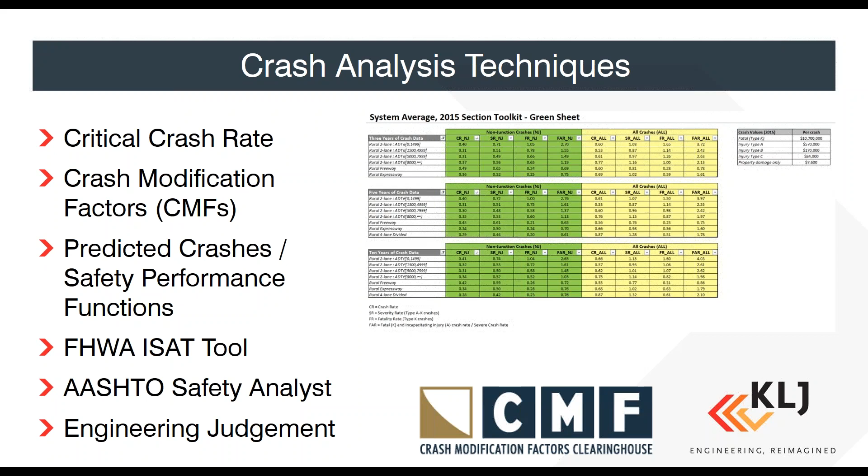When we really look at the basis of all these future crash analysis techniques, CMF data is really at the basis of all of those. And what happens with CMF data is, because it's based on a number of different studies, some of these improvements have quite a big range of what that expected safety benefit is.

So two examples I pulled out. One was a DDI interchange, converting an at-grade or diamond interchange to a DDI. I pulled all the crash types and crash severities that lined up where they were all the same, and even after filtering out some of those crash rates, we still have a range of about 0.54 to 0.81 CMF factor. That's over a 30% difference in those expected safety benefits for that type of interchange.

J-turns or reduced conflict intersections show an even greater range of safety benefit when you look at the applications, between 60% all the way down to only a 13% improvement, which makes a big difference when you have some of those higher injury type crashes, and really can skew your final preferred alternative one way or another based on which CMF factor you're choosing.

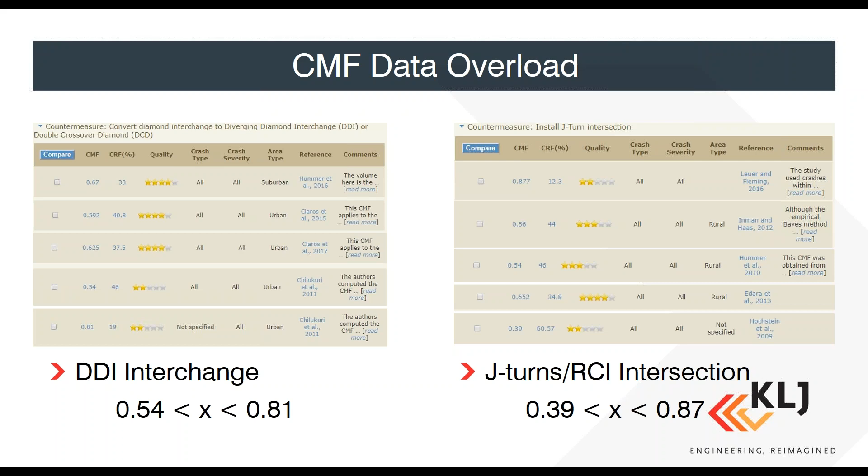So this is really what prompted me to look for other tools that are out there. One of those tools was the IHSDM, the Interactive Highway Safety Design Manual, or model, which has more of a design focus.

It has different inputs such as horizontal alignment, vertical alignment, lane offsets, shoulder sections, design speed, driveway density. And when you really look into these details, there are a lot of spots where if you don't have that level of detail, you're really still guessing, and there's a lot of variability in those values and what your final answer might be coming out of a safety analysis like this.

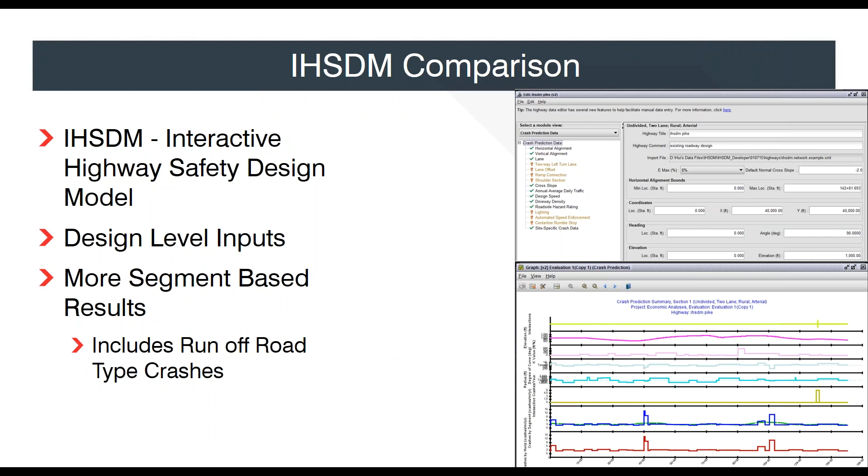So this is really more of a segment-based software that's looking at kind of those final design type safety benefits. It does a very good job of including run-off-road type crashes and really looks at all the different crash types you could look at. But there are still some holes when we're really looking at that preliminary stage, looking at 3 or 4 alternatives and trying to pick which one's best for us as traffic engineers.

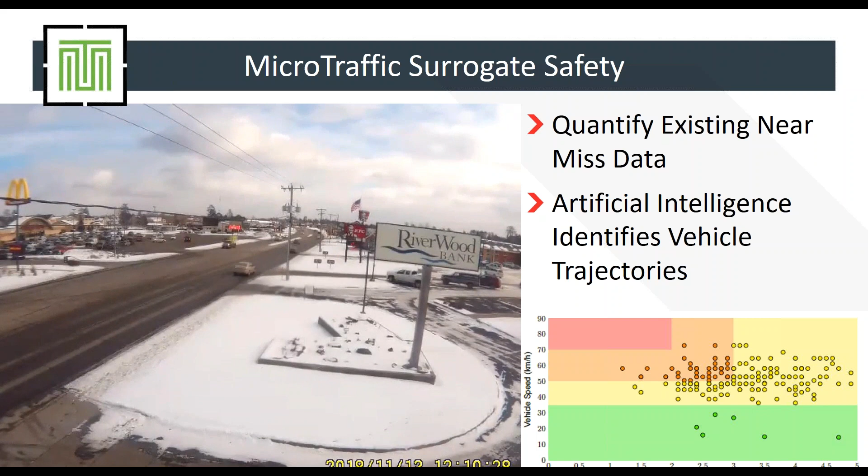So getting into the SSAM modeling approach, this is an example from Bemidji, Minnesota, where we used a company called MicroTraffic to really start looking at the existing safety and existing conflicts on one of our study corridors. What we did with this data is try to quantify the existing near-miss data that's happening on these roadways. As you'll see in these 3 or 4 examples, these vehicles are only having about a 1 to 2 second gap where they're getting across traffic before another vehicle intersects that trajectory.

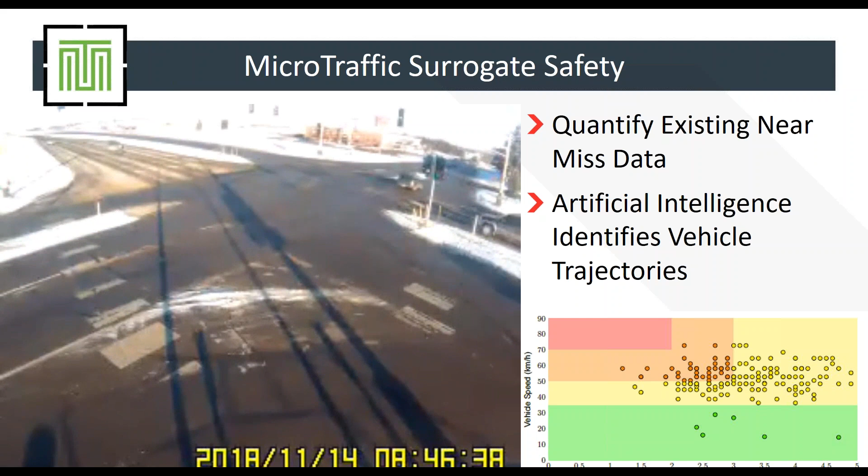By quantifying these near-miss type conflicts, we can start looking at what truly is the existing conflict potential of that intersection. In this example, those permissive movements and crossing movements are the most dangerous - when a vehicle makes a mistake, a second or two earlier or later could cause a pretty serious crash. So these are the exact type of conflicts that we're trying to minimize through our design of improvements, to try and improve the safety at both the intersection and the corridor as a whole.

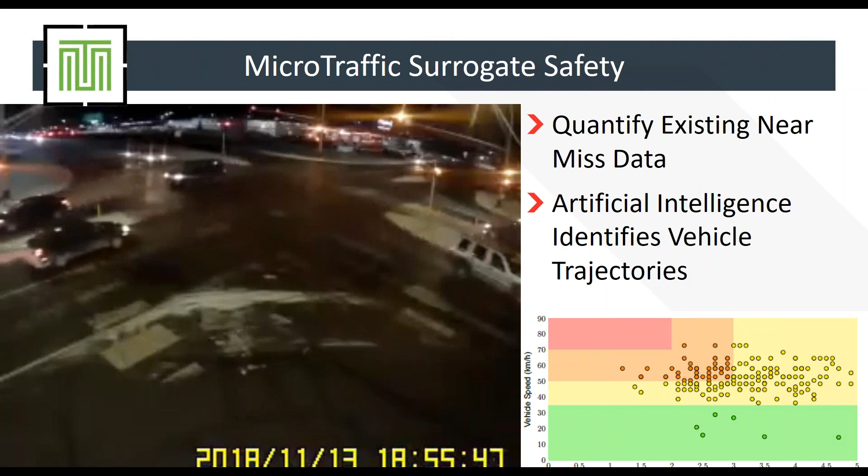Getting into the surrogate safety assessment model basics, the conflicts are broken up into three types: crossing conflicts, lane change conflicts, and rear end conflicts. Crossing conflicts are basically anything between a right angle to a head-on type conflict in the trajectory file. A lane change is when vehicles are shifting lanes, around that 30 degree angle. And a rear end type conflict is when one vehicle is coming up behind another vehicle, and if they didn't make that braking decision in time, they'd end up rear-ending the vehicle in front of them.

SSAM also does a good job of allowing you to calibrate time to collision and post-encroachment time. Time to collision is that front gap ahead of a possible collision, and we look at everything from 0 seconds to 1.5 seconds out of VISSIM. Then that maximum post-encroachment time is more for rear-end type conflicts, where we've actually taken that down from the default of 5 seconds all the way down to about 1 or 2 seconds to better validate from our existing data in our models.

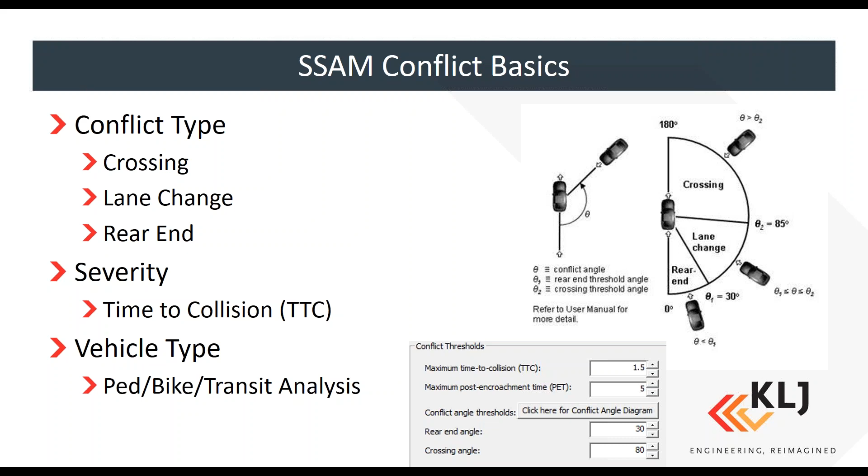The SSAM analysis really starts out with how you're coding your VISSIM models. VISSIM is by far the best tool to use with SSAM because it's literally checking one box in your evaluation configuration to output this trajectory file of the vehicles. So it's very important to have your sensitivity at that 0.1 second, so we're getting 10 time steps per second to really look at the interaction between vehicles. It's also important to keep those constant parameters when you're modeling.

Having a guide to go by for priority rules and conflict areas where these vehicles are interacting is very important in keeping your models consistent as you're comparing alternative to alternative, and with increased volumes in future models.

Also doing realistic VISSIM calibration, watching your models, making sure you don't have vehicles crossing other vehicles, is very important. Making sure signal timing's correct. All of these lead into issues - if there's a mistake in your VISSIM model, you're going to have a situation where one spot really pops out as having a safety issue in the SSAM analysis.

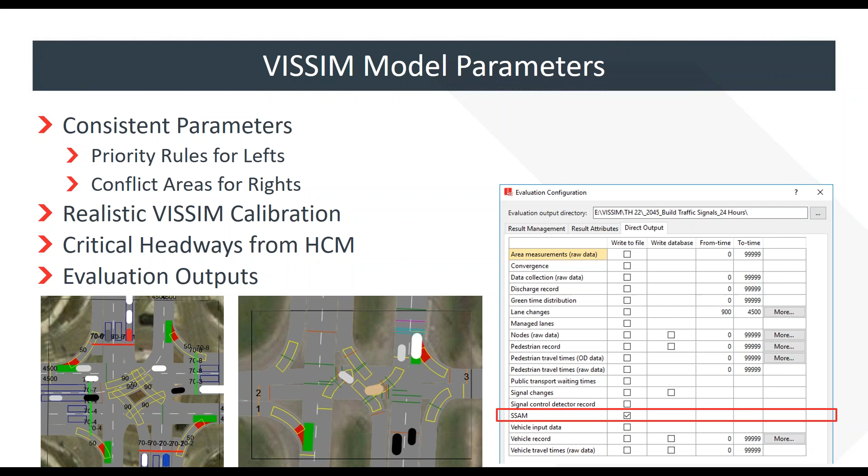Also, basing your priority rules on critical headways from the HCM is important to give that variability - some vehicles having that more aggressive behavior at unsignalized intersections or permissive movements, and some vehicles having that more conservative nature when they're interacting with other vehicles.

Specifically, a couple of intersections I've pulled out: mini roundabouts and roundabouts. Those are very important to look at for larger vehicles, WB-62s going through, where you might need an additional priority rule to allow that vehicle to clear out of an intersection before the priority rule allows another vehicle to enter it.

If you think of the real life application of a mini roundabout, if there's a large size truck in the roundabout, you're probably not going to try to pull into the trailer of it. You're going to allow it to get through the roundabout and then have that priority rule. So really taking a look at the modeling, looking at those crossing gaps and trying to get them as realistic as possible is very important.

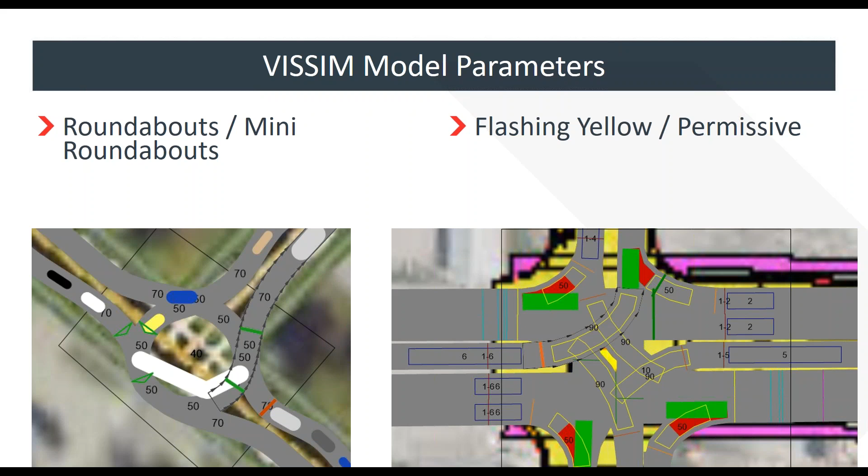Same thing with flashing yellow and permissive movements. We code these as having the signal group in the priority rule, so that when that signal group turns yellow - in this case that phase 2 direction - the left turn will actually make that movement on yellow. And if one of the eastbound or westbound through vehicles does go through that yellow light, we're actually going to have that crossing conflict. That's what gets quantified in some of our signalized intersections, the conflict that we're looking at to try to prevent in these modeling exercises.

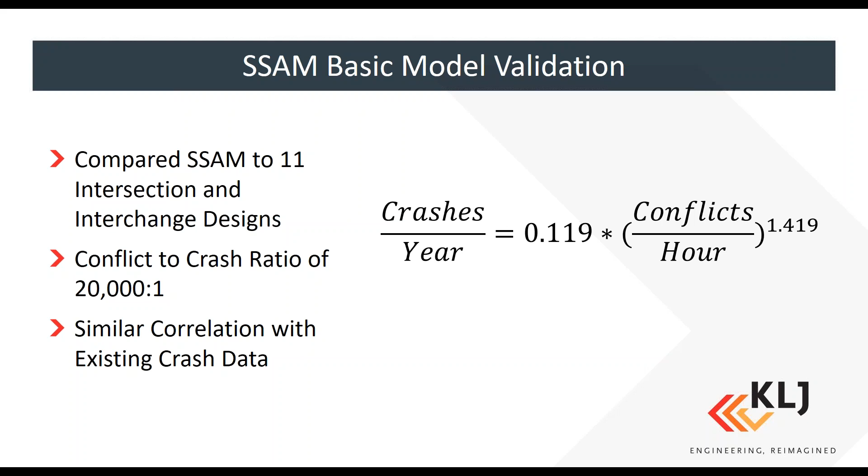The basic model validation for SSAM was done by FHWA. They had quite a few different intersection and interchange designs that they looked at, and they came out with a general conflict to crash ratio of about 20,000 to 1. So 20,000 conflicts in the model end up being about 1 crash in real life. They had similar correlation between what they were looking at in modeling exercises and what was actually happening with 5-year or 10-year existing crash analysis.

But before we really started using this on a lot of our projects, we wanted to create that validation too. Some of these are projects we worked on in Minnesota, one up in Brainerd, one in Bemidji. We really started looking at the total vehicle conflicts out of VISSIM and how they compared to the crashes per year that were actually happening. When you look at that 11.9 and 8.2, and then the 63 versus 45, our modeled conflicts were actually a little bit higher than the crashes that were actually happening out on the corridor.

That's more attributed to rear end and lane change conflicts. We were able to fix a little bit of that through adjusting the post-encroachment time to bring down those rear end type conflicts and better match that existing crash rate for our existing models.

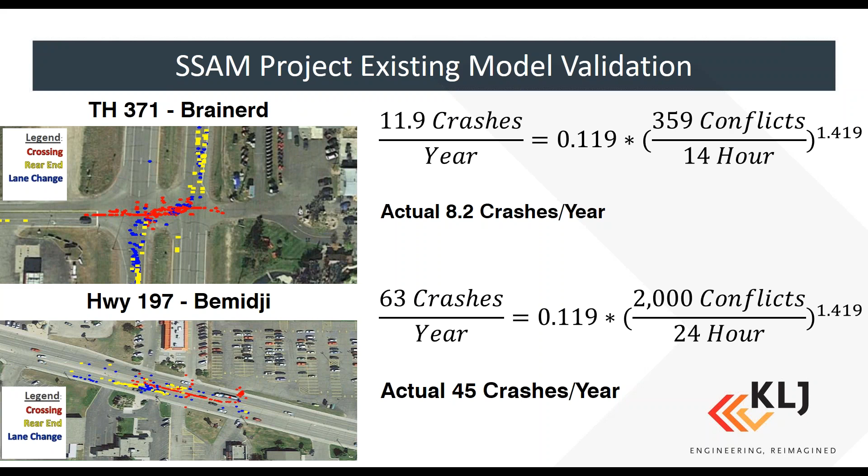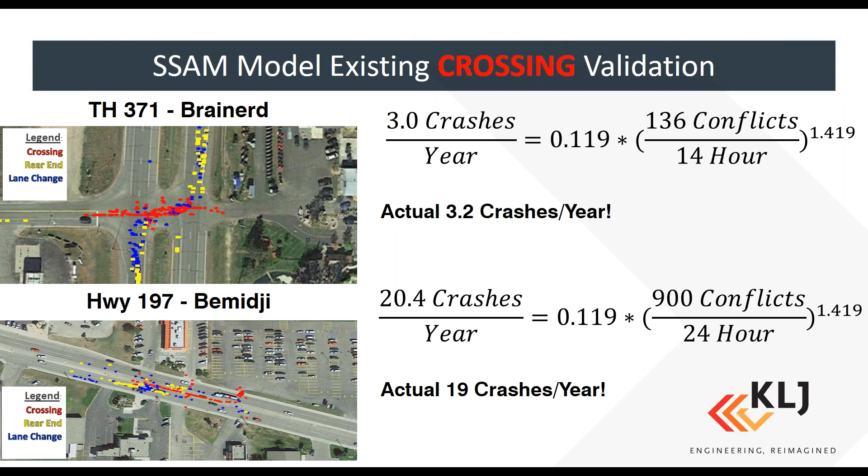But what we also noticed was when we looked at only the crossing conflicts happening on these projects, we found it was a much better comparison between what was being modeled and what was actually happening in real life. Throughout this presentation, you'll hear me talking more in detail about these crossing conflicts, because these are the right angle type crashes or head-on type crashes that are usually most severe, and we really want to avoid these and look at the reduction of these more heavily than the other conflict types.

So getting into some of the project examples that KLJ has worked on.

One of the projects up in Bemidji, Minnesota on Highway 197, we had a very high crash rate on this corridor. There were 45 crashes, and a lot of these were serious injury type crashes, costing the community $1.6 million per year. As you can see on the bottom, there are 8 signalized intersections, a couple of major minor approaches that had significant volumes. Those unsignalized locations had kind of that 20 to 40 seconds of delay for those left turns, and this was projected to increase to almost a minute per vehicle of waiting to make that left turn movement out of these accesses.

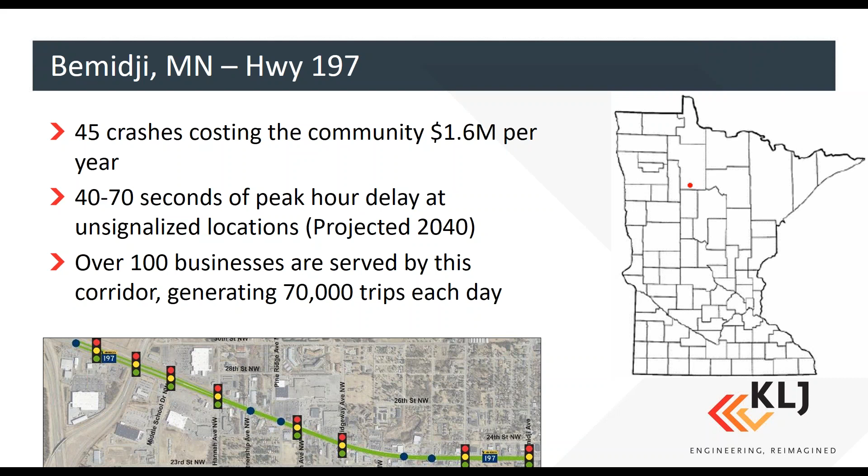Another big part of this project, we had over 100 businesses served on this corridor, and access was very important to all of these businesses. There were almost 60 accesses in about a mile spacing on this corridor. So it really was an access management type project that we were dealing with, and we really needed a way to show the safety benefit of reducing and consolidating some of these accesses.

So when we looked at the existing conflict analysis for this project, rear end conflicts were a very high percentage of the total conflicts on the corridor. These were happening out in kind of the west end of the corridor, where there were high vehicle traffic, high speeds, and signalized intersections. So when you mix all three of those together, you do end up with a lot of rear end type conflicts.

Those did match what we were seeing in the existing crash data too. However, we also see quite a few crossing conflicts and lane change conflicts being a part of this project, specifically on the east part of the corridor, where there were a lot of protected permissive type signals, as you can see at Irvine Avenue, where we had a lot of crossing conflicts. And then in the major retail sections where there were a lot of business accesses, we saw a lot of lane change and crossing type conflicts not at those major intersections.

So as traffic volumes grew, we saw the conflicts grow quite substantially more than just the linear traffic growth. For 2040, we had about a 25% traffic growth rate. We also had an alternative that showed the peak recreational volumes along this corridor, which was about a 40% growth rate over that weekday existing period. And what we saw in those crashes is that the crashes for that 2040 no build were over two times as much as the traffic growth, and for the summer rec period, it was 3 times just the traffic growth.

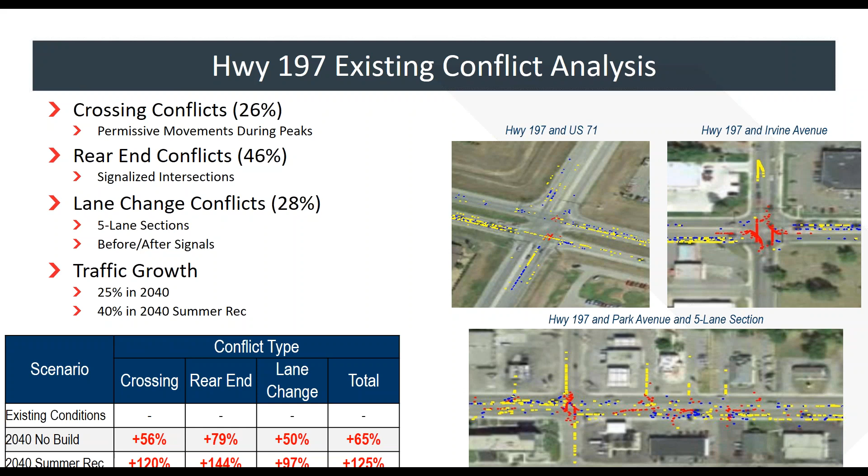So when we started looking at alternatives for this, we looked at some medians. We looked at redoing the signals to more protected movements. For one alternative, we looked at roundabouts with a wide median for another alternative. And then 2 alternatives that got thrown out early were decreasing to a 3-lane section and some access consolidation only along the corridor, which both of those alternatives were thrown out early because they were both increasing the crash rate or conflict rate, and they were increasing delay along the corridor.

So this Alt-1 and Alt-2 really saw some benefits. Alt-1 with the signalized alternatives, we looked at implementing a bunch of right plus U-turn type movements for the accesses, allowing that 3/4 intersection so that there was a lot more access into a business, and then you had to make that right plus U-turn out of the business. We actually saw a total reduction in total conflict, and we also saw all 3 categories decrease in that crash rate versus the no-build alternative.

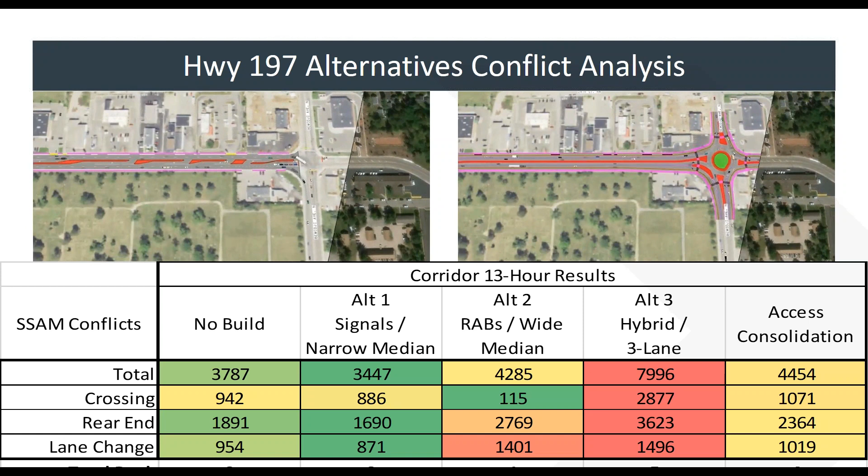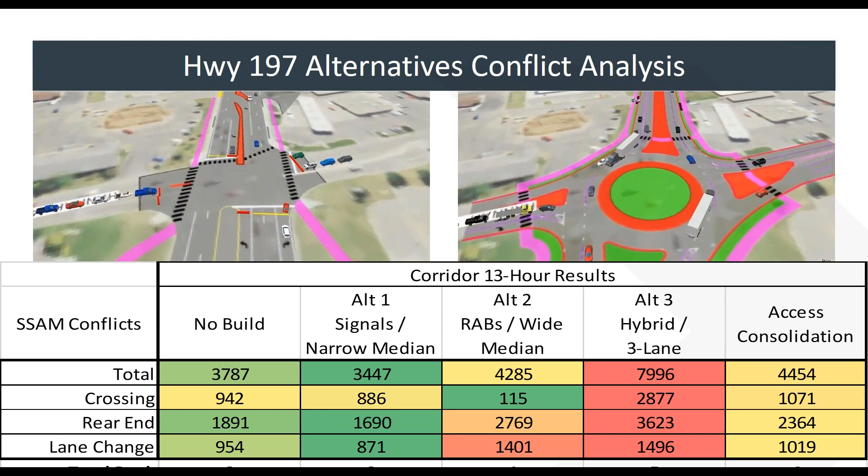However, one of the big advantages of alternative 2, the roundabout, was that crossing conflicts were decreased by about 85 to 90%. And when we look at these crossing conflicts, these are the severe injury type crashes - I'll go back to that a lot through this presentation, where we're really looking at the safety of the corridor. So in the total safety ranking on the bottom, we gave that crossing reduction about 2 times the weight as the other rear end and lane change type conflicts, because of that improvement in the severity rate. And that ended up showing that alternative 2 was one of the best safety improvements for this corridor.

Another project that we worked on was up in Brainerd, Minnesota on 371. And again, it was kind of an access management study. We're really trying to show the benefit if we are taking away access from business, what is that safety benefit to vehicles going through the corridor and getting to and from that business still.

This specific project had a lot of event and recreational traffic with Brainerd International Raceway along the corridor. So there's about 100,000 people that come out to events during the summer at Brainerd International Raceway. So there's a lot of traffic coming in and out of this approach.

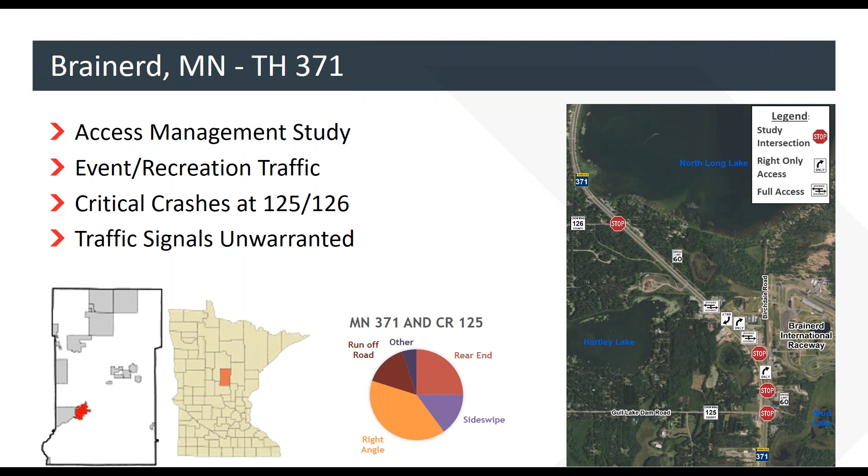There were critical crash rates at both county roads on the bookends of the corridor, but traffic signals weren't warranted along this corridor. So MnDOT's previous recommendation had said just put a traffic signal at both of these intersections, but there was really a re-looking at this intersection because it wasn't going to meet those traffic signal warrants.

So when we really started looking at the SSAM outputs for each alternative, we noticed that crossing conflicts were, again, quite high with these unsignalized side street stop approach, full access intersections. And because there were about 7 or 8 of these along this corridor, drivers along 371 had a hard time knowing where traffic was coming out of, and it was really spreading the conflicts out throughout the corridor, as you can see in that vision on the left side.

As we started looking at different alternatives, we really saw these consolidating access plus implementing these RCI type intersections, so the right plus U-turn, cut down these crossing conflicts by 90%, 95%.

The total safety benefit, kind of looking back against those CMF factors I brought up earlier, looking at that CMF between 13 and 61%, we actually are decreasing those total conflicts as well, about 49%. So that's kind of right in that range. It gives us a lot better idea of what this actual safety benefit would be along this corridor. And again, looking at those crossing conflicts, the huge benefit in taking away all those crossing conflicts except for the left in at those 2 major intersections.

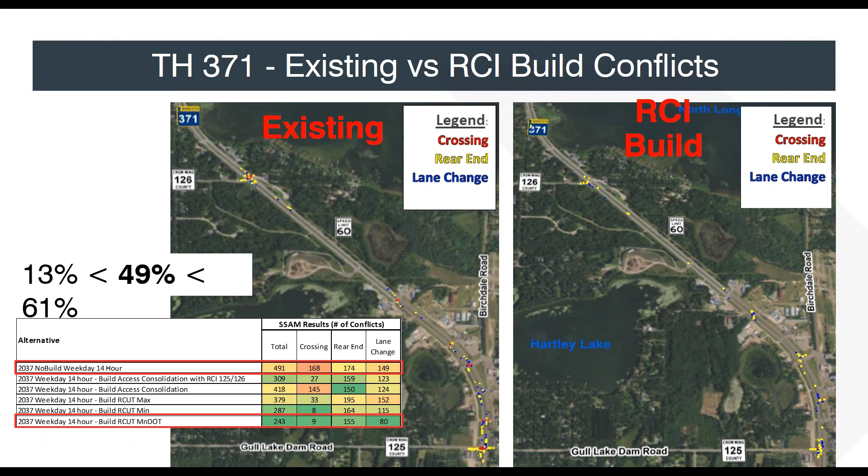So kind of looking at our proposed alternative, you'll see that traffic isn't making those full access type movements. You're not getting that 2-stage type crossing. And overall, it's a lot better of a corridor for limiting those conflicts.

So for the future alternative, we did propose 5 RCIs from those 8 existing intersections, allowing those vehicles to make the right plus U-turn movement, which really only creates those crossing conflicts for the U-turn movement and the left turn in movement. And on the right side, you can see that with the volumes that were in the model, these crossing conflicts were almost non-existent for this specific alternative.

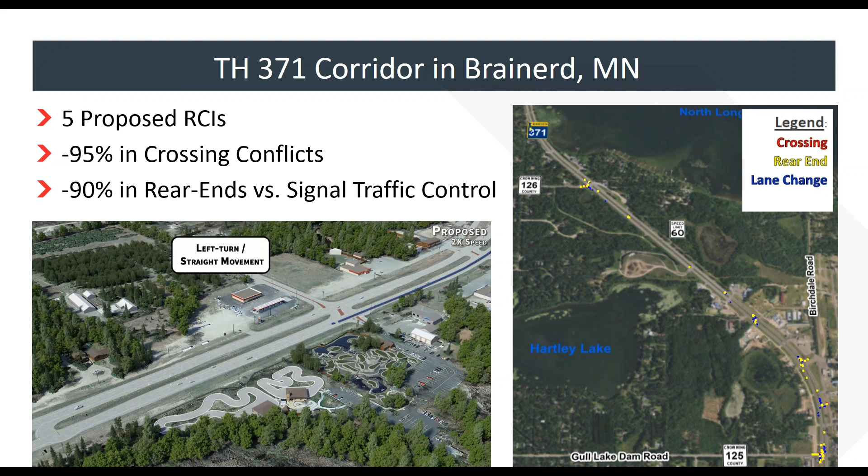Our third example that we have, it was a lot higher volume than the previous examples. This was in Mankato, Minnesota, so south central Minnesota. 6 critical crash intersections were identified along this corridor, 2 of those being existing multi-lane roundabouts at Adams Street and Madison Avenue. And really what MnDOT was looking for was, do we continue along with implementing these multi-lane roundabouts, or should we turn this back into a signalized corridor?

So one impact with this study is, instead of just looking at peak hour analysis, we wanted to look at 24-hour safety and operational benefits that we could see in the roundabout model versus the signalized model.

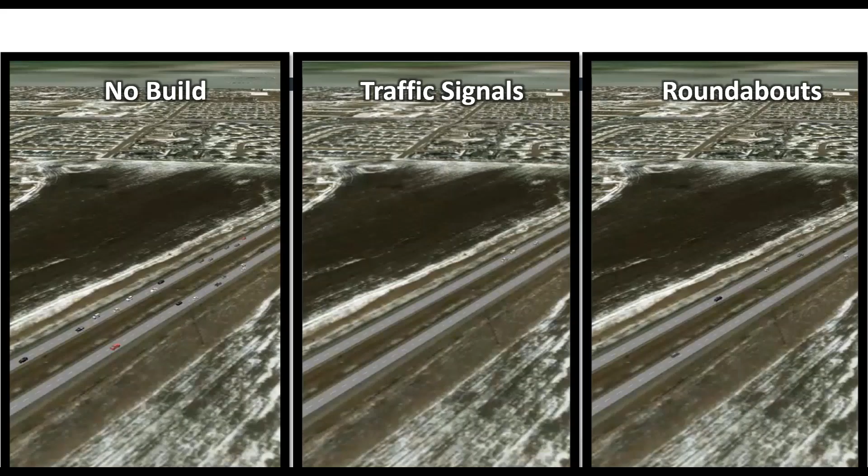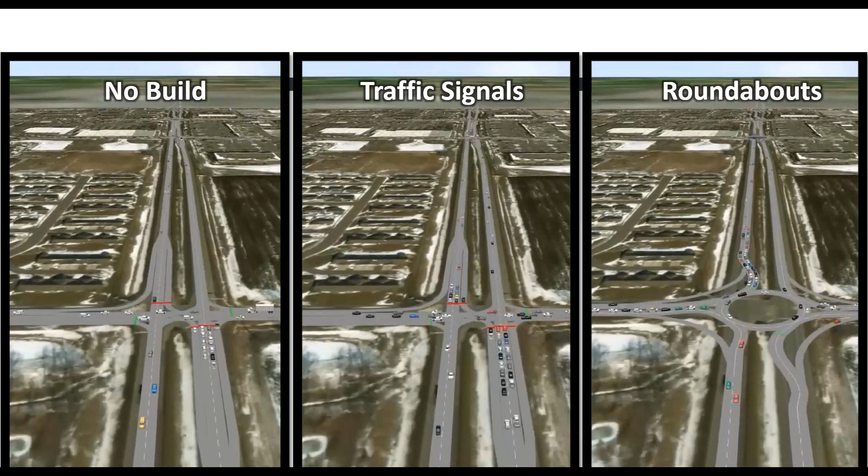And so when we modeled this in Vissim, we started to see that, yes, during the PM peak hour, the roundabout modeling did have worse operations than the traffic signals, and there was some queuing, and it was about a 10 to 15% operational deficiency in the roundabout model versus the traffic signal model.

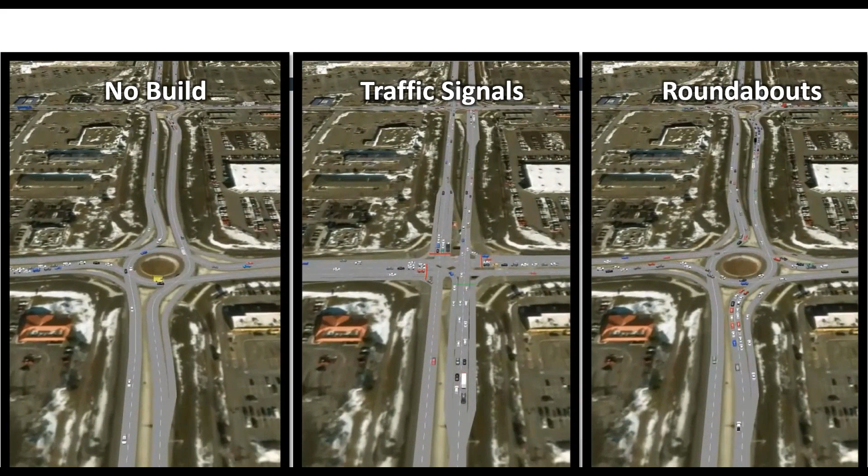And so as we went to stakeholders with this information, they really started questioning whether that no build with the two roundabouts at Adams and Madison was still kind of that preferred vision for the corridor. Did they really want to change this into a full roundabout corridor where there was a mix of both 2x2 and 2x1 roundabouts?

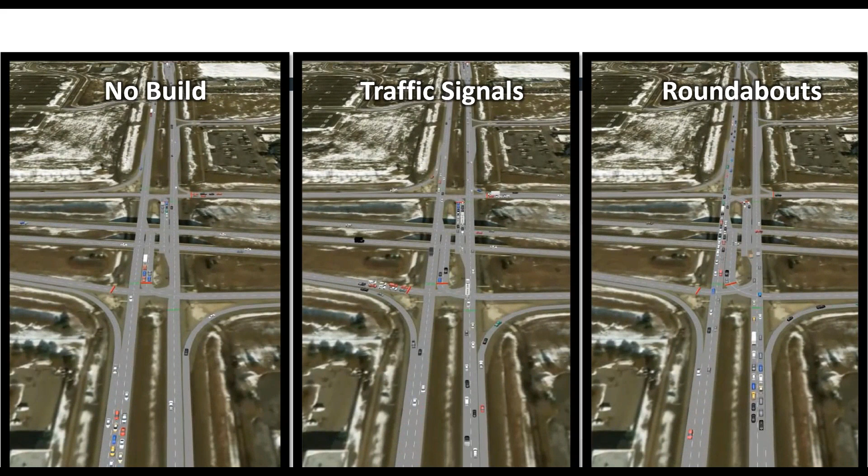And so as we looked at these operational results, you can see from this daily representation of delay that, yes, in that PM peak, the roundabouts did operate worse than the signals, but the other 23 of 24 hours of the day, we were able to limit that operational delay at those roundabout intersections. Looking at the average delay per vehicle totaled up, the roundabouts actually minimized about 25% of that delay

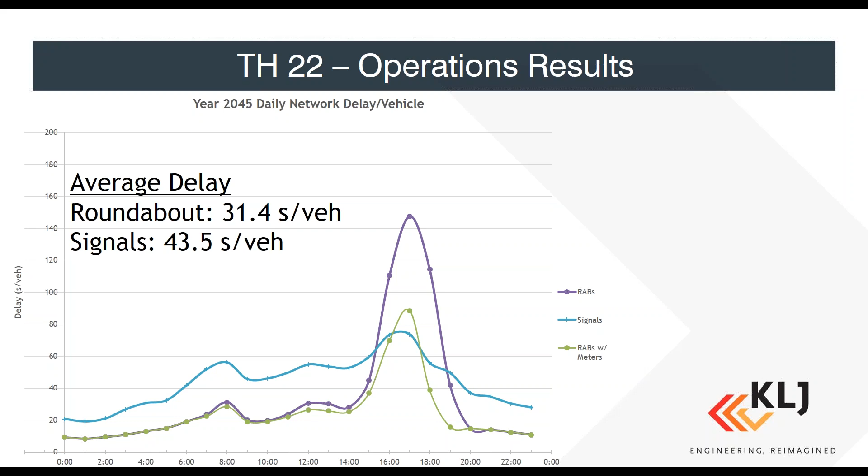in the signalized model. So looking at this, the stakeholders really felt confident that by 2045, if they were seeing the aggressive traffic forecasting that they were making, they could still implement meters at a few of these roundabouts to really keep that delay under control. But when we looked at safety, the roundabout corridor really was maximizing the safety benefit versus the traffic signal corridor.

So for 2030, which was the forecast they felt more comfortable with, we were seeing a 10% decrease in total conflicts, with about a 15% decrease in crossing conflicts, even having some 2x2 and 2x1 type roundabouts along the corridor. By 2045, although the total conflicts did rise, especially with the meters, we were still minimizing those crossing conflicts, actually at more of a benefit with the roundabouts than with the 2030 volumes.

So we were really able to show that, yes, you might have a higher crash rate with some of these roundabouts, which is what they were looking at with existing crash rates, but they are a lot less severe, and the total conflicts are really only going to be about 10 to 40% more than they are today.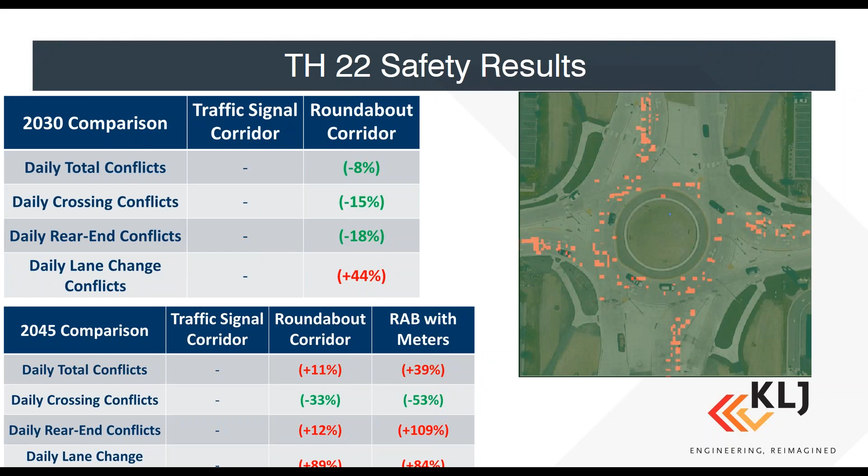Our last example here is in Grand Forks, North Dakota. This was on the UND college campus. So we were really looking at ped, bike, and transit considerations along this corridor, looking at the multimodal conflicts along this 2-lane, 3-lane section. But they really wanted to expand the cross-section to prioritize transit, bikes, and peds, where the original corridor wasn't doing that.

So we were able to give the stakeholders this SSAM map of the existing hotspots for where vehicle collisions were happening along the corridor. And they were happening at, yes, the major signalized intersections, but there were also some minor approaches that were showing a lot of crossing conflicts that could be improved with either a traffic signal if volumes warranted that, or a roundabout, or some type of improvement at those intersections.

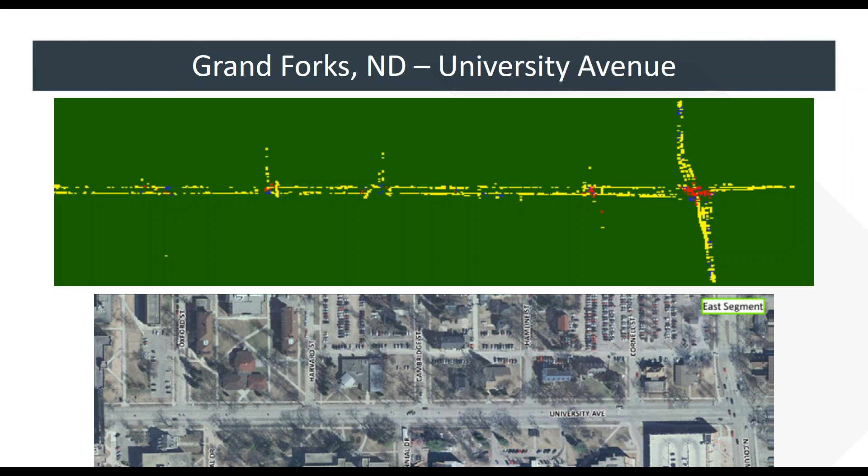But where SSAM was very useful was really identifying where those ped conflicts were happening. Because this was an unsignalized corridor, there were multiple ped crossings along the roadway where peds could cross and have to stop vehicles. And during major class time arrivals and departures, vehicle traffic was really just going crossing by crossing, having to stop for these peds crossing the road. During peak times, vehicles knew to look out for peds, but during those off-peak times when there were a lot less peds, it was a lot harder for vehicles to see those peds and stop.

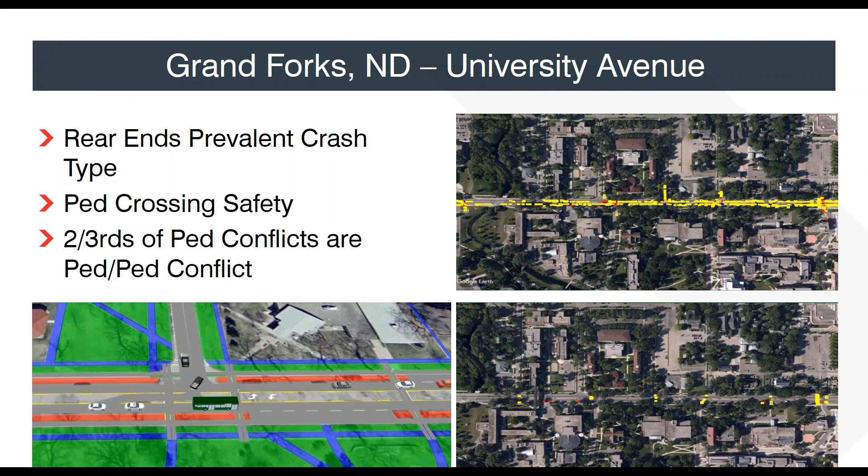And so as we started modeling, we did notice that there were a few crossing locations that did start to show crossing conflicts that you can see in that bottom right. We were able to just take those pedestrian interactions out of the SSAM data and really look at where these conflicts were happening. We were also able to filter that graphic even further because we noticed in the SSAM data that peds running into peds also quantified as a rear end type conflict. So we were able to filter that data even further to really only look at those vehicle and pedestrian type conflicts.

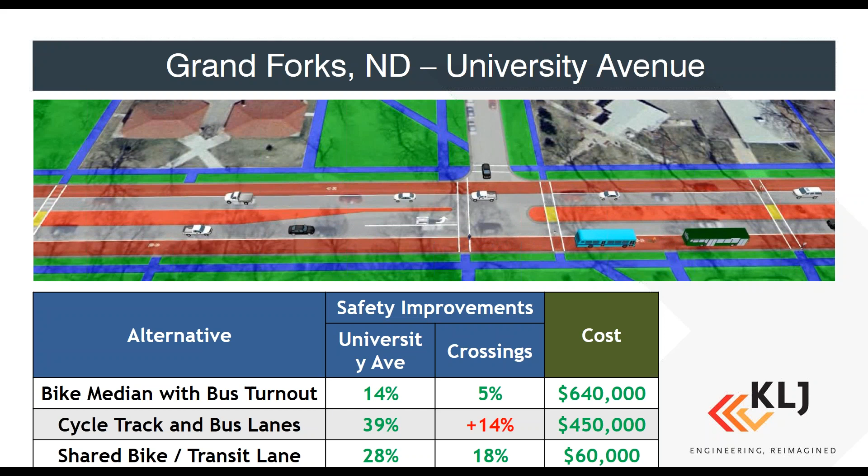And lastly, when we started looking at those improvements with a cycle track or a bike median and a bus turnout, and then our final preferred option of a shared bike and transit lane, we were really able to prioritize both the University Avenue safety improvements for vehicles as well as those pedestrian crossing locations, and also take into account the cost of the project too, to really pick that solution that had the best combination of all of those.

So the final slide I have here is, where do we use SSAM? We've been using it on almost every VISSIM study that we do, whether that be a corridor study or an access management type study. We've used it on reduced conflict type intersections. We've used it on roundabout intersections. And then we've also expanded that to looking at pedestrian and bicycle safety by being able to filter out the multimodal conflicts and really looking at a good representation of what the future safety of the corridor is going to be.

As with every one of my presentations, I also like to pick apart ways to improve the method, really using those daily VISSIM results to understand what's happening during the day. We've noticed a lot of benefit in that versus just running those peak hour type analysis.

Especially in that Mankato example, we're able to show a lot of benefit outside of that peak hour and really take that into consideration both for operations and for our safety data. Being able to filter the link and lane numbers to determine the mode would be a helpful way in SSAM to really prioritize the software.